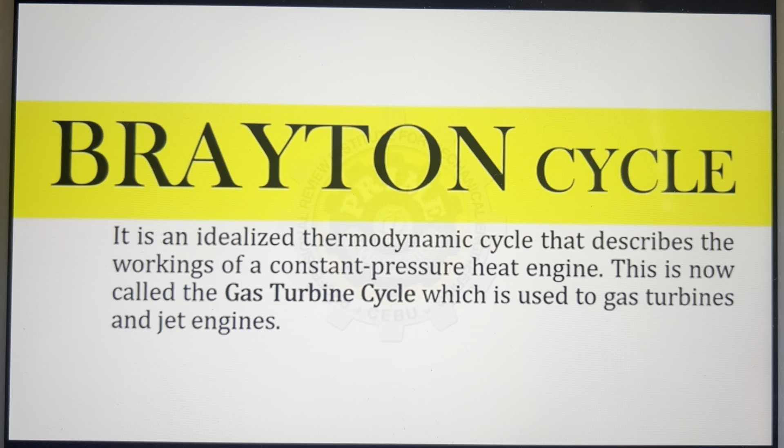It is an idealized thermodynamic cycle that describes the workings of a constant pressure heat engine.

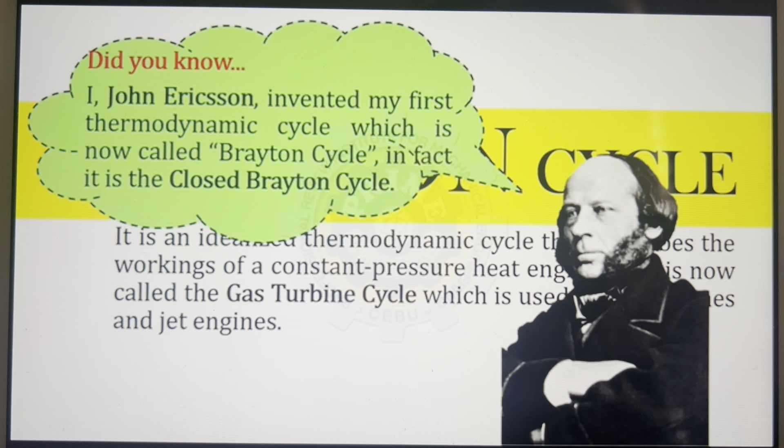Pagdating sa Brayton cycle, marami rin mga pangalan ang involved. Una na dyan, si John Ericsson, kung saan nabanggit natin sa Ericsson cycle na the first heat engine cycle na imbento niya ay ang tinatawag ngayon na closed Brayton cycle. Ganun din, since maraming contribution when it comes to the concept ng Brayton cycle, kaya siya ni-name after George Bailey Brayton.

At meron pang involved dyan, si John Barber naman, ang kauna-unahang nag-patent ng first engine cycle using the Brayton cycle. Though dahil maraming contribution si Brayton, sa kanya pinangalan.

Kaya tinatawag rin siyang Joule cycle kasi si James Prescott Joule, siya rin yung nag-provide ng first theoretical description doon sa pagiging constant pressure cycle. Anyway, doon tayo sa tawag sa kanya, which is the Brayton cycle or the Joule cycle.

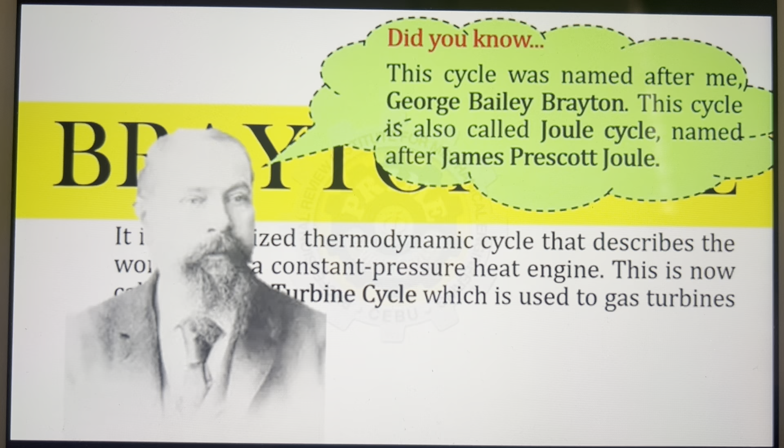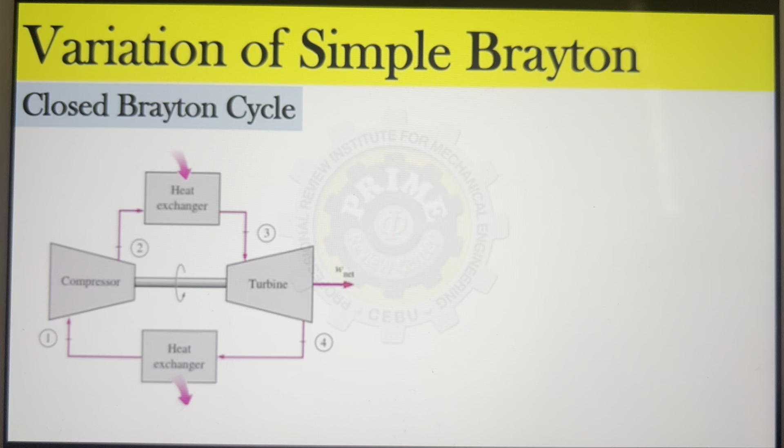Ang mga processes na involved sa Brayton cycle ay constant entropy, constant pressure, constant entropy, and another constant pressure process. Brayton cycle is usually used in the gas turbine.

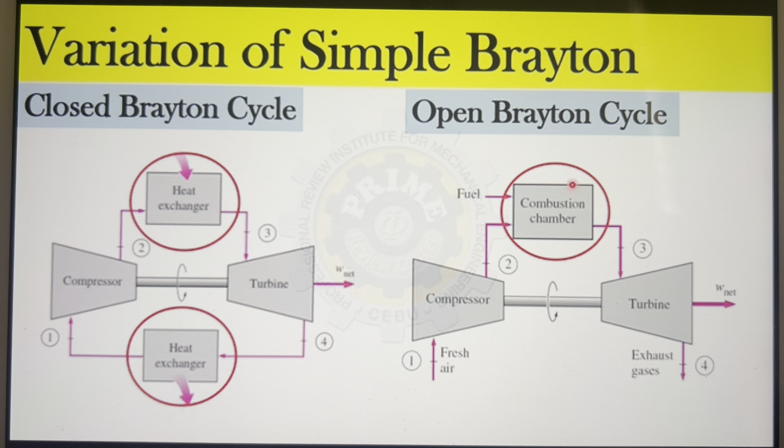We have here two of the variants of a Brayton cycle: closed Brayton cycle and open Brayton cycle. Makikita natin sa diagram na ito ang difference ng dalawa. Sa closed Brayton cycle, meron tayong dalawang heat exchanger, while open Brayton cycle, meron lang siyang isa, ang combustion chamber.

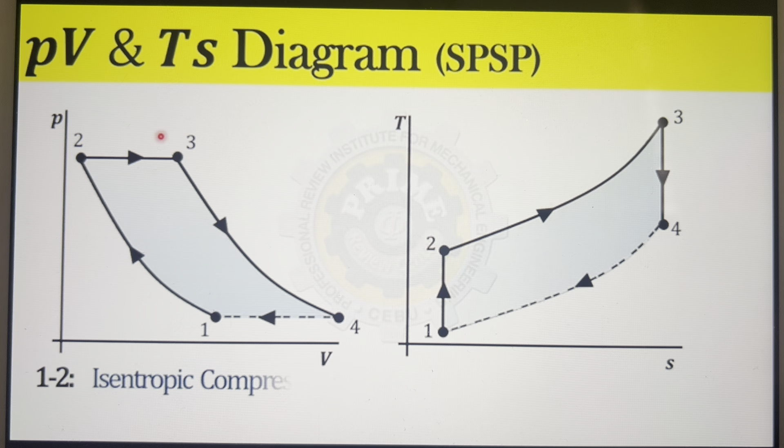For the simple Brayton cycle, makikita rin natin dito ang PV diagram at ang TS diagram ng isang ideal simple Brayton cycle.

Mula point 1 papunta sa point 2, ang tawag natin dito ay isentropic compression, kung saan meron tayong fresh air na papasok sa compressor para pataasin ang temperature and ang pressure.

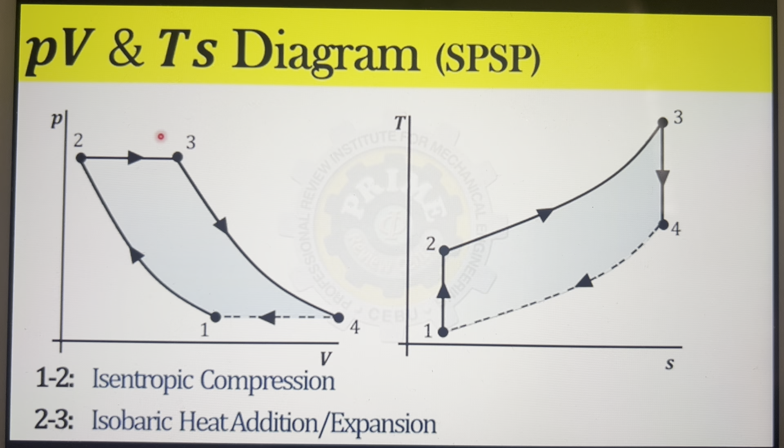Mula point 2 to point 3, ang tawag natin dito ay isobaric heat addition. The compressed air proceeds into the combustion chamber, kung saan mag-mix ito with the fuel at constant pressure.

Mula point 3 to point 4 naman, isentropic expansion ang tawag dito, wherein the high temperature gases enter the turbine, where they expand to produce the work.

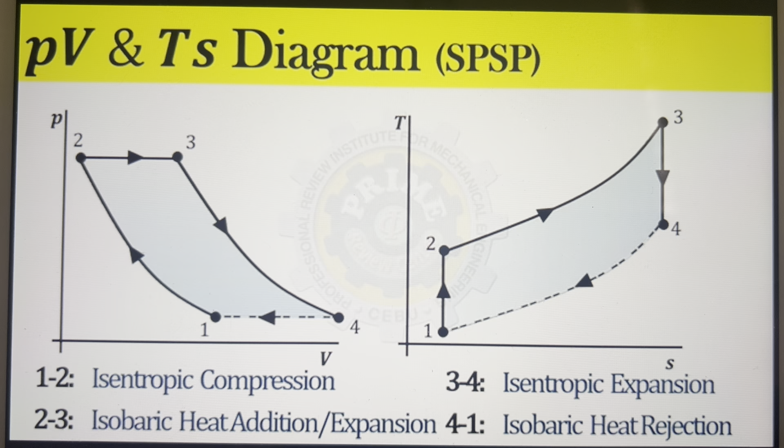Then, point 4 pabalik sa point 1, that is isobaric heat rejection. The exhaust gases exit to the atmosphere, releasing heat to the surrounding.

Pupunta naman tayo sa mga formula na ginagamit sa simple Brayton cycle. Makikita natin sa TS diagram ang mga state points na gagamitin natin, so be aware sa mga ito.

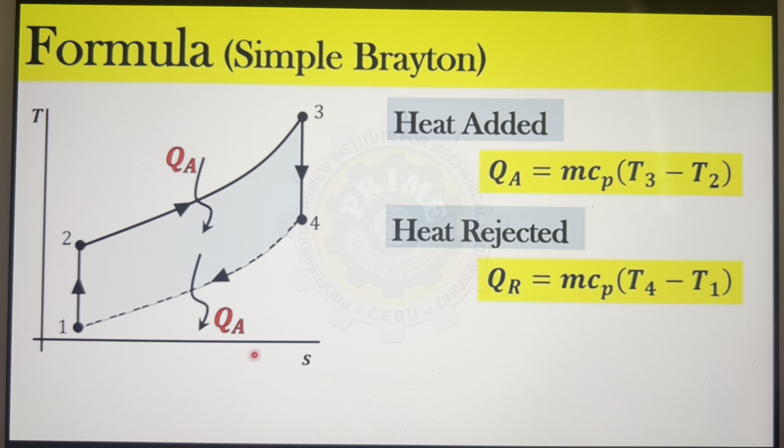Una, sa part na ito, dito natin i-compute ang heat added. At ang formula niya is MCP, T3 minus temperature 2.

Next naman, sa part na ito, nandyan ang heat rejected. Ito yung kanyang formula, MCP, T4 minus T1.

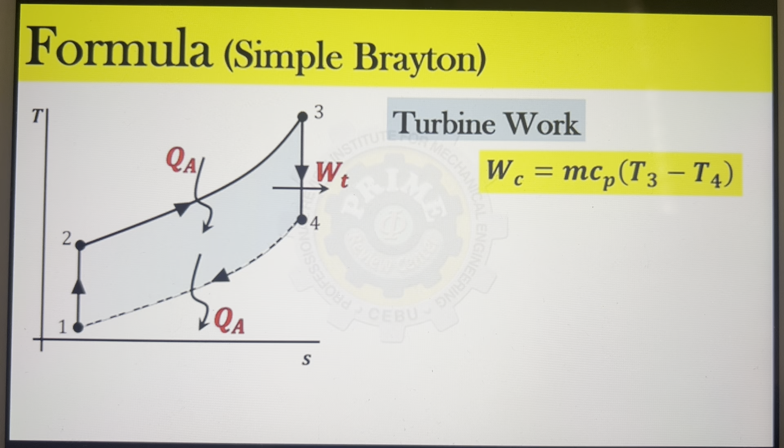Next naman, sa part na ito, dyan naman natin kinocompute ang work ng turbine. Ang formula, MCP, T3 minus T4.

And sa work ng turbine, certain part dyan ay dinadala natin dito. Dyan natin naman kinocompute ang work ng compressor. We have MCP, T2 minus T1.

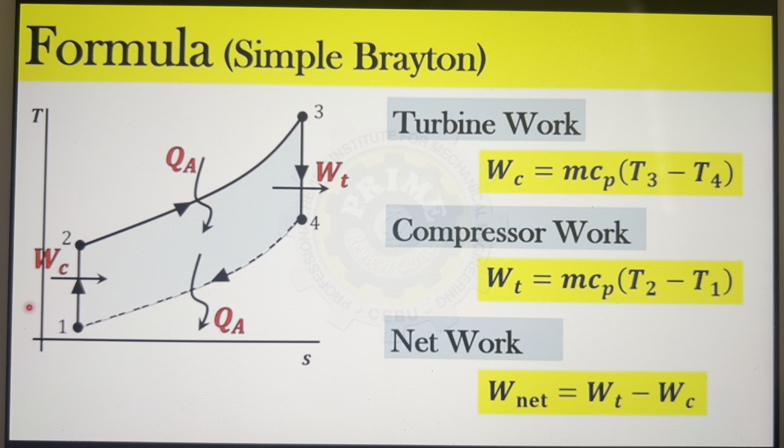Meron tayong tinatawag na pressure ratio, simply the ratio of the pressure sa outlet at inlet ng compressor.

At nabanggit na rin natin kanina na part of the work ay binibigay natin doon sa compressor. At ang tawag naman natin doon ay back work ratio, simply ratio ng compressor work divided by the turbine work.

For the Brayton cycle, by means of the pressure ratio, ito yung isentropic relationship. Gagamitin natin ang pressure ratio sa isentropic. Ito yung kalalabasan: temperature and pressure ratio.

And another one, dun sa kabila, ito yan. So take note, ito ay para lang sa simple Brayton, kung saan ang pressure 1 is equal to 4, ang pressure 2 equals to pressure 3. That's why ito yung kalalabasan. So since pareha sila ng right side, pwede natin i-equate yan. We will arrive for this formula.

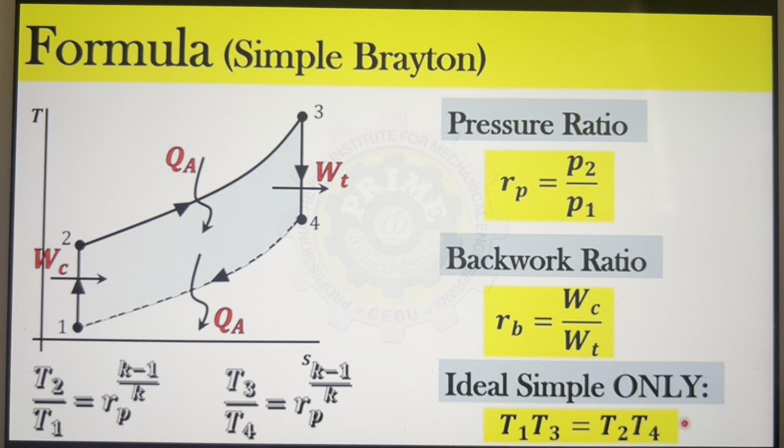Same ng Otto cycle kung babalikan natin, ito yung relationship ng temperatures natin sa ideal, simple Brayton cycle. So yun yung mga formula natin involving yung mga state points sa Brayton cycle.

Then ito yung pinakamahalaga sa mga cycles, the thermal efficiency. Thermal efficiency, general formula, that is work net over QA.

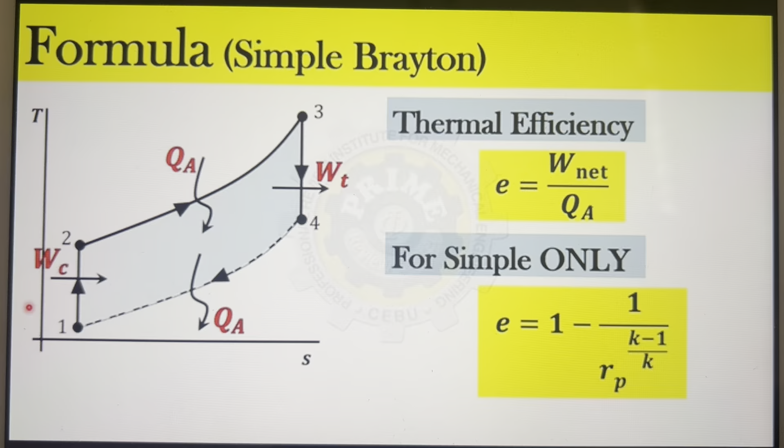Pero meron tayong mas mabilis na formula kung sakaling given ang pressure ratio. Ito yung formula natin, at ulitin lang natin katulad kanina, yan ay applicable lang sa ideal, simple Brayton cycle.

An ideal Brayton cycle operates between 15 psia, 60 degrees Fahrenheit, and 100 psia, 1,500 degrees Fahrenheit. The compressor and expander are both perfectly efficient. Find the thermal efficiency, net work, and back work ratio.

First, we construct the TS diagram of the simple Brayton cycle. Then determine what are the given.

Makikita natin sa problem ang terms na ideal Brayton. Pag sinabi natin Brayton cycle, the type of substance is a gas, and for being ideal, we consider it to be air. Although kahit di man sabihin sa problem, ang default naman natin ay air, unless stated. Since that is air, we should be familiar with the value of K, which in standard is 1.4.

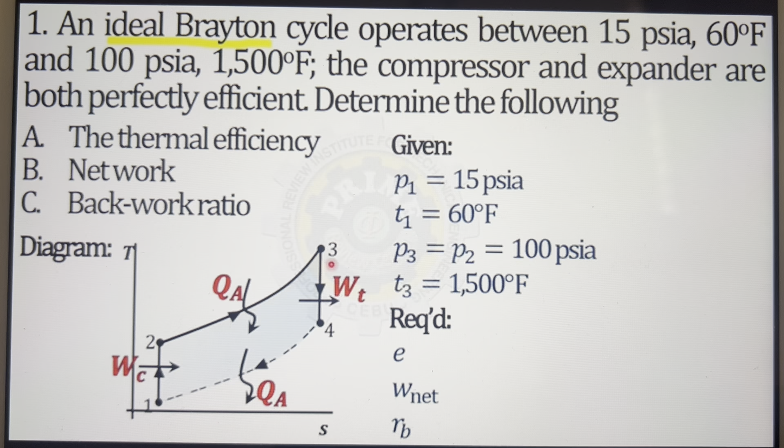Then, 15 psia and 60 degrees Fahrenheit for point 1, 100 psia and 1,500 degrees as point 3. Tanong, bakit 1 at 3 ang designation natin? Okay, that is because the properties given refer to the minimum and the maximum points in the cycle. Since the ideal cycle has isobaric processes, pressure 4 equals pressure 1 and pressure 2 equals pressure 3.

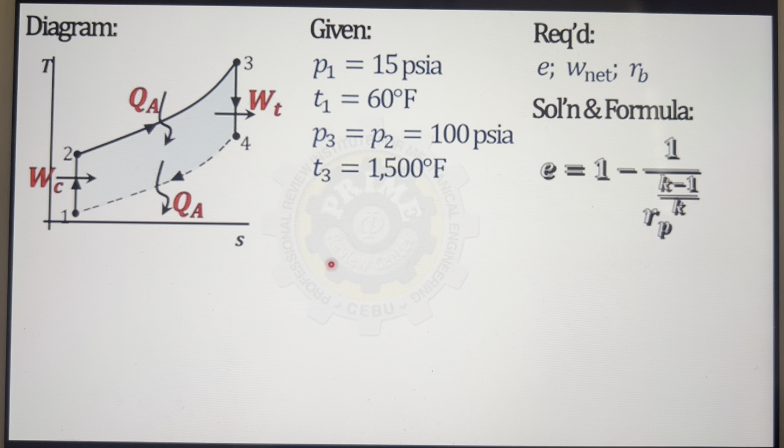Ang required ay the thermal efficiency, net work, and back work ratio. We have two formulas for thermal efficiency, either of the two will lead us to the same answer. Based sa problem, ang gagamitin natin ay ang simplified formula kasi mas mabilis ito kumpara dun sa isang formula.

Okay, we still have the unknown value pressure ratio, then we will substitute it to the original formula. We have now the answer, efficiency equals to 0.4184, and multiply by 100% gives us 41.84%.

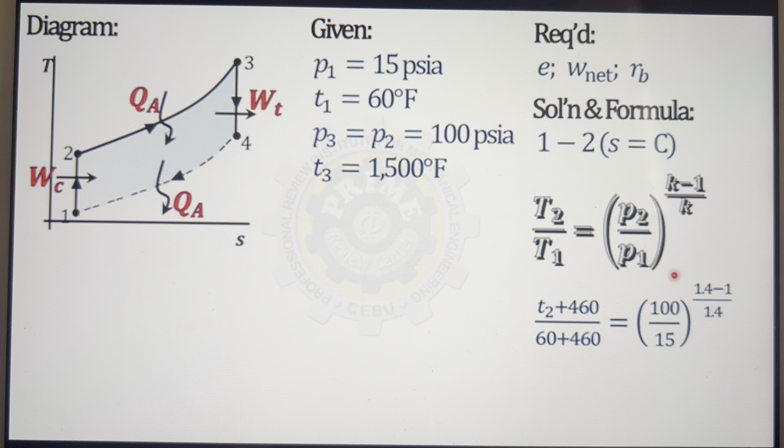Let's continue for the net work. Our solution starts with the path function 1 to 2, isentropic process. Recall that in isentropic process, the relationship of temperatures and pressures is in this form. May we substitute the given to the formula. In the formula, temperature is in absolute, so we should add 460 for every arbitrary temperature. Now we get the compressor outlet temperature to be 434.14 degrees Fahrenheit. Next, at temperature 4.

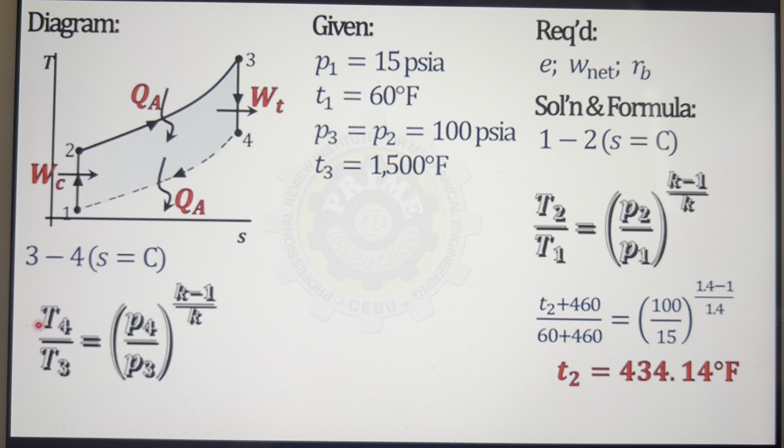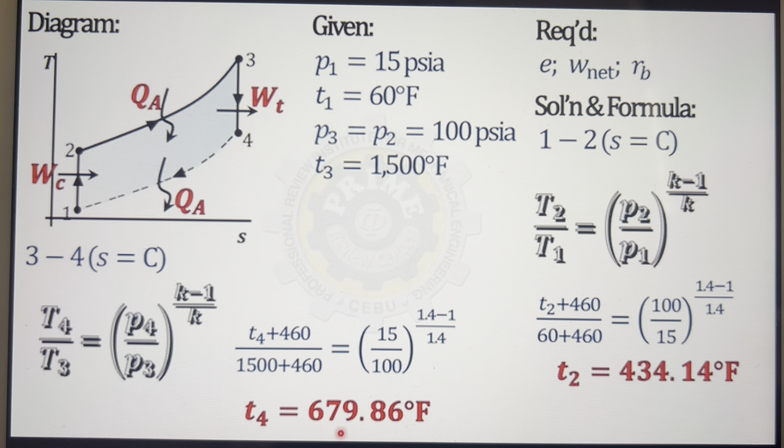Our solution starts with a process from 3 to 4, again another isentropic process. I simply change the subscript to 3 and 4. I substitute the given to the formula and we will get the answer.

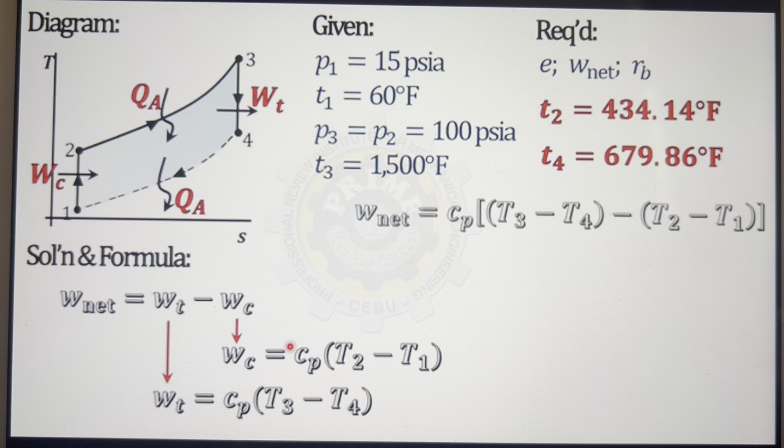Let's continue for the net work. The formula is, first substitute the compressor work, next is the turbine work. Then the formula is using this formula, and we have 107.04 BTU per pound.